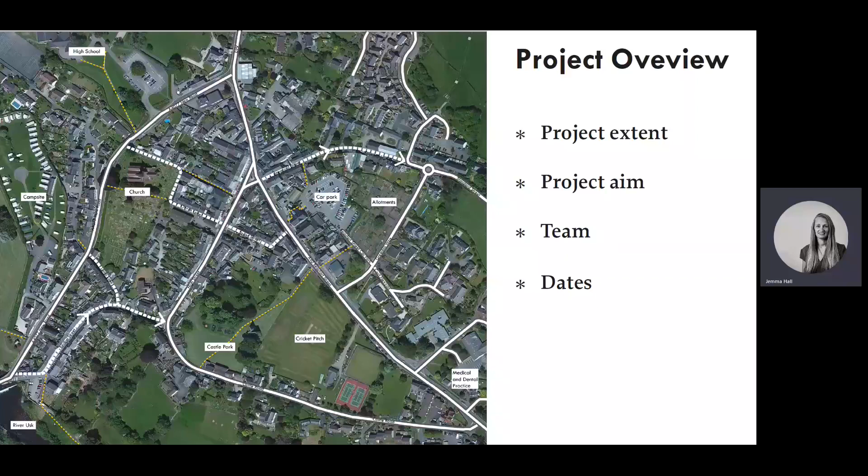With the focus on the northern section of the High Street, there are several key considerations that inform any changes: facilities and users, heritage and identity, and space for cars and pedestrians.

The type of facilities and who uses them is an important consideration. There are a varied and successful mix of building uses ranging from retail, leisure, services and residential. The independent spirit and vibrancy of these businesses contributes hugely to the success of the High Street. It is well used by local residents, students and tourists for shopping, local services and facilities, and leisure.

There are also features in the street which provide facilities for people, such as seating to stop and rest, planters and bollards to protect people, signage and lighting. How the public realm provides a setting for local residents and people visiting and working the businesses is a key consideration.

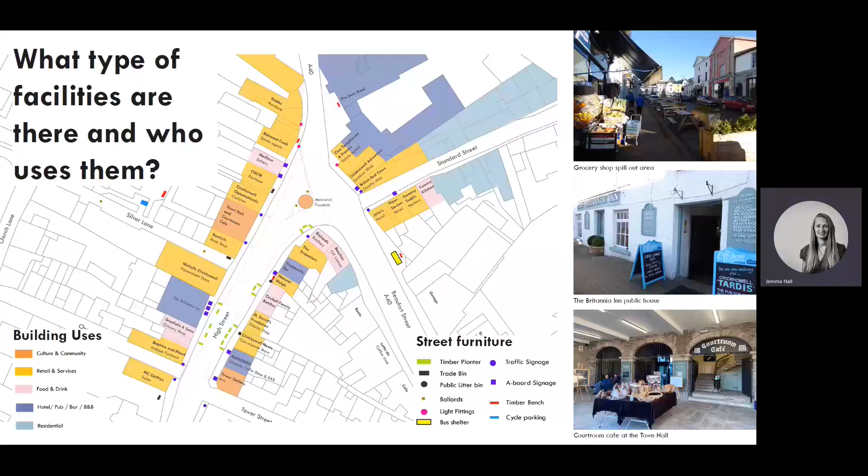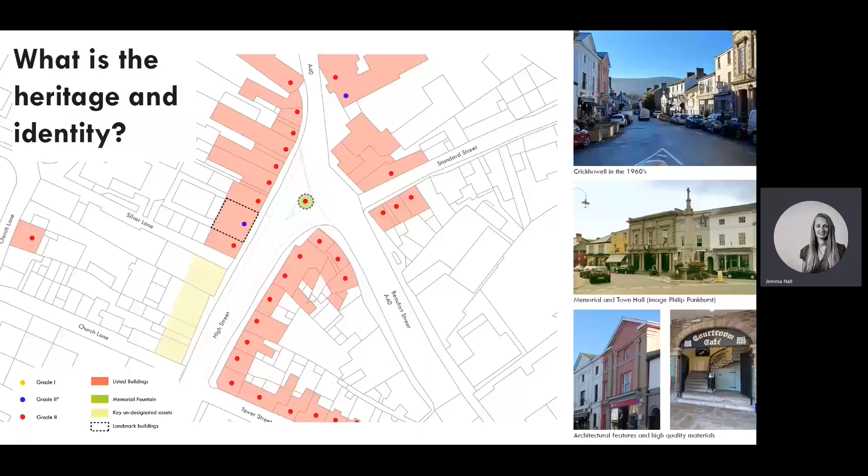A considered response to the historic elements and identity of the street will also be important. The High Street is historic in character and is located within the Crickhowell Conservation Area, as identified in the Crickhowell Conservation Area Appraisal. Some of the important characteristics are the many listed buildings, the landmark buildings of the Town Hall and Memorial Fountain, local materials, and the views out that connect it to its setting within the Brecon Beacons.

The space allocated for car parking and pedestrians, and how people get to and around the High Street, is a key consideration. For example, connections from the main car park, crossing the busy A40, and the alignment of the zebra crossing, connections...

Access-only streets and how these are used, high curbs and parked cars preventing easy access for crossing for pedestrians from one side of the street to the other, the amount of parking on the High Street and the length of time people park for, and loading and deliveries for businesses.

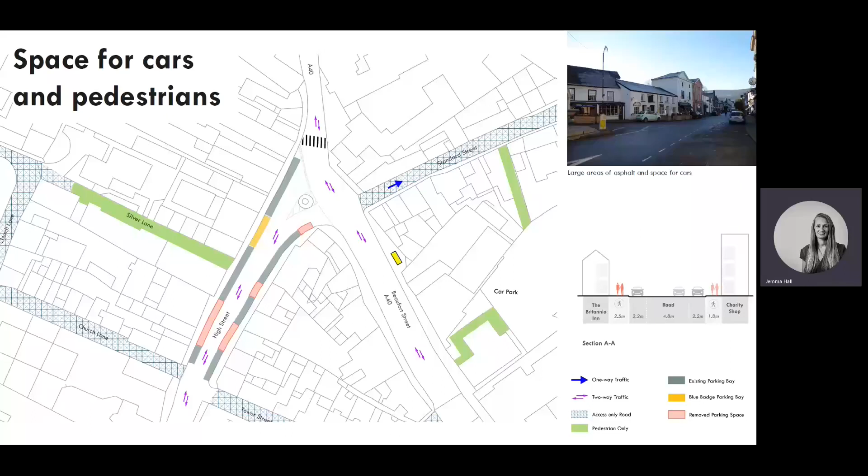Based on the key considerations, we've looked at the opportunities these might present to improve the High Street. These broadly fall into four opportunities: improving pedestrian priority, improving pedestrian experience, considering drainage issues, and enhancing identity.

Improving pedestrian priority by considering pavement width, surfacing and crossings to create more space for people. The example images illustrate what this might mean and how changes have been made in other places: reclaimed pavement space and reduced road widths making more space for pedestrians, visual continuation of pedestrian surfacing particularly across junctions creating improved routes, and block paving in parking bays replacing asphalt, improving the look and feel of the street.

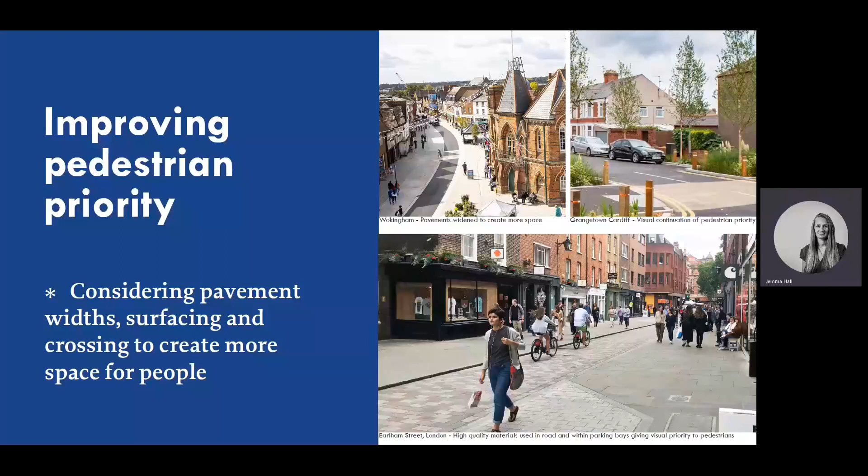Improving the pedestrian experience by reallocating space to introduce areas for spill-out space, meeting and seating and resting areas. The example images illustrate what this might mean and how this has been introduced elsewhere: coordinated seating and planters providing a multi-purpose element in the street, reducing street requirements; reallocated parking bays providing seating areas; and reallocated road and parking areas providing spill-out space with potential for small events.

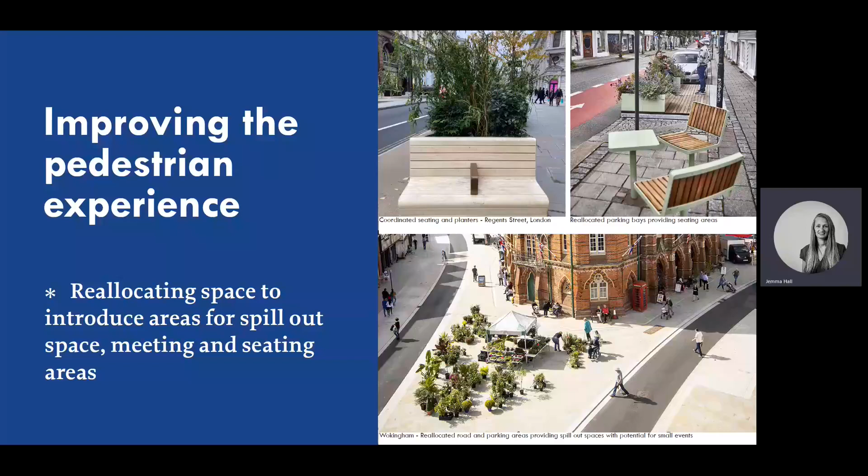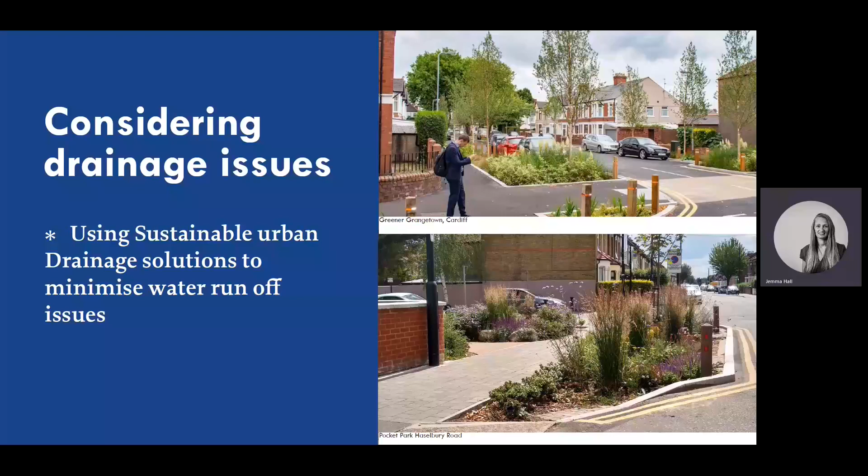Considering drainage issues and reducing the potential for flooding on the footways is also an important consideration. These are currently susceptible to flood due to poorly installed drainage provisions. By using sustainable urban drainage solutions, such as planting with curb inlets to accept water runoff and ensuring coordination of planting with underground utilities, the example images show illustrations of what this might mean and how this has been introduced elsewhere. For example, planting areas with curb inlets allow water to flow into the planters and seep into the ground, or permeable surfaces that allow water to infiltrate between paving units.

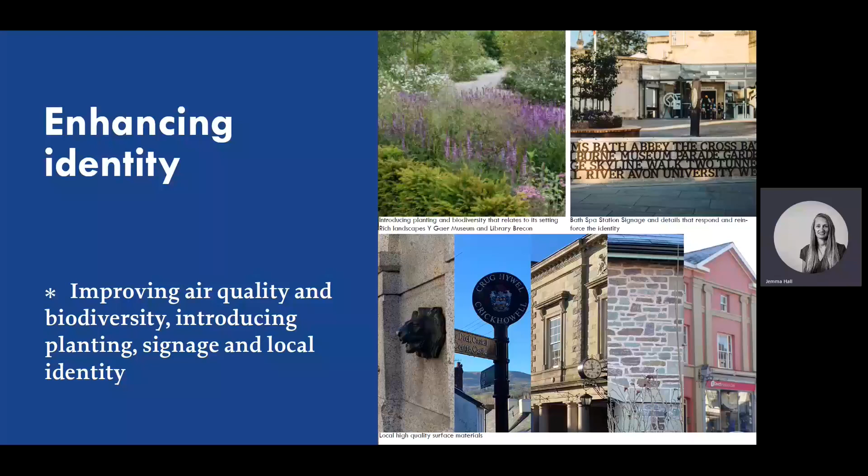The following slides will show how the high street changed during COVID and proposed options that we'd like your feedback on.

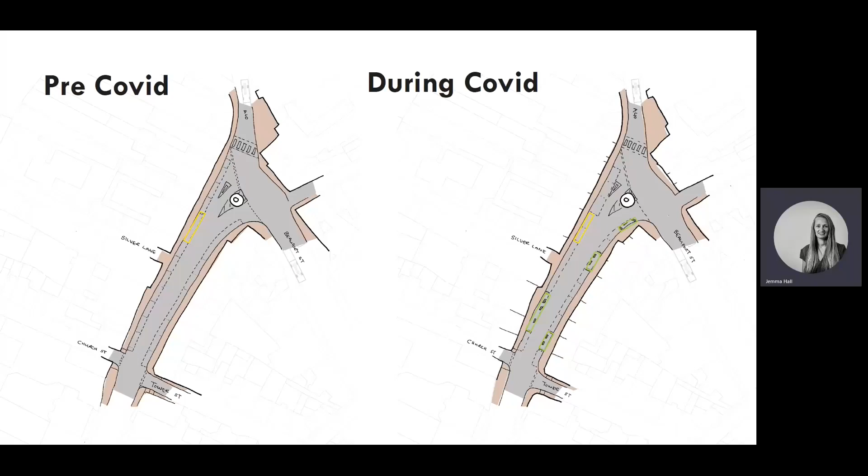The high street adapted during COVID. Pre-COVID, there were 22 parking spaces, including 2 blue badge spaces. During COVID, planters were introduced to allow for social distancing and additional spill-out space for pedestrians. This moved spaces out from the pavement in some locations to widen the area usable to pedestrians and reduce the parking spaces to 15 spaces, including 2 blue badge spaces.

Enhance space outside the town hall on option 1A to allow spill-out space and more street presence. New raised table pedestrian crossing point on the high street linking to the school, church and library. Planting and sustainable urban drainage using the change in levels from the raised table to help prevent flooding problems. Reduced expanse of asphalt using block pavers for parking areas and surface crossing points to visually reduce road width and dominance of vehicle space. Continuation of pavements across junctions to connect spaces adjacent to the high street and extend pedestrian priority to wider areas. Surface junction to highlight the start of the pedestrian priority area and deter vehicle access to Tower Street and Church Street.

Enhanced blank facades with the potential for artwork or a mural, and improved pedestrian connection to the car park. Option 1A retains 9 parking spaces with 2 blue badge spaces with an increased area dedicated to pedestrians outside the town hall. Option 1B retains 14 parking spaces, including 2 blue badge spaces, with curbside parking retained along the entire north side from Silver Lane to Beaufort Street.

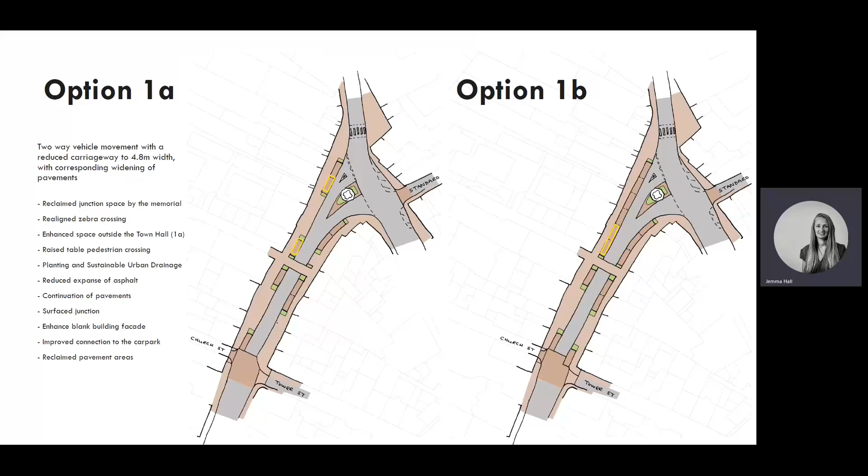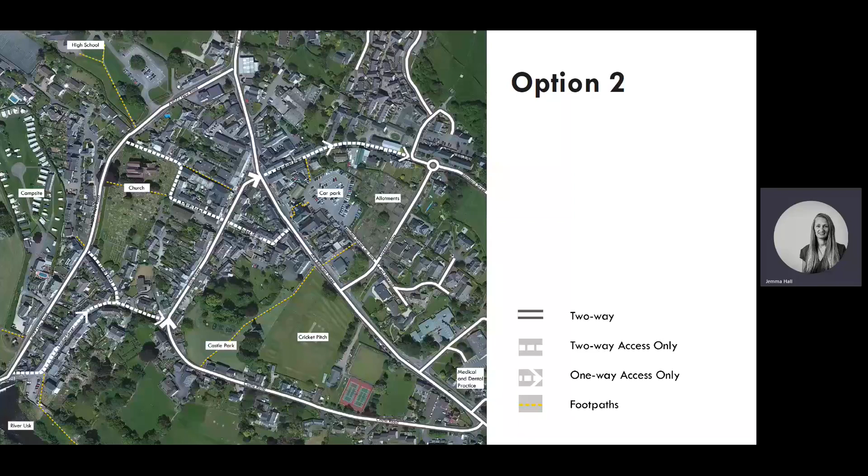2 further potential options for the high street reduce the vehicle access to one way, allowing vehicle access in from the south with vehicles exiting to the north. Option 2A and 2B are based on one-way vehicle movement with the carriageway reduced to 3.6 metres width and the corresponding widening of pavements. The proposed changes and elements are the same as option 1, except in option 2 the reduced width and one-way approach allows for a greater area to be reclaimed at the junction space, creating an attractive setting for the memorial that people can access, space for people to dwell and enjoy the views with seating, planting and a flexible space for events.

Option 2A retains 7 parking spaces, including 2 blue badge spaces, and has an increased area for pedestrians and events adjacent to the memorial. Option 2B retains 14 parking spaces, including 2 disabled spaces, with angled parking introduced in the space adjacent to the memorial.